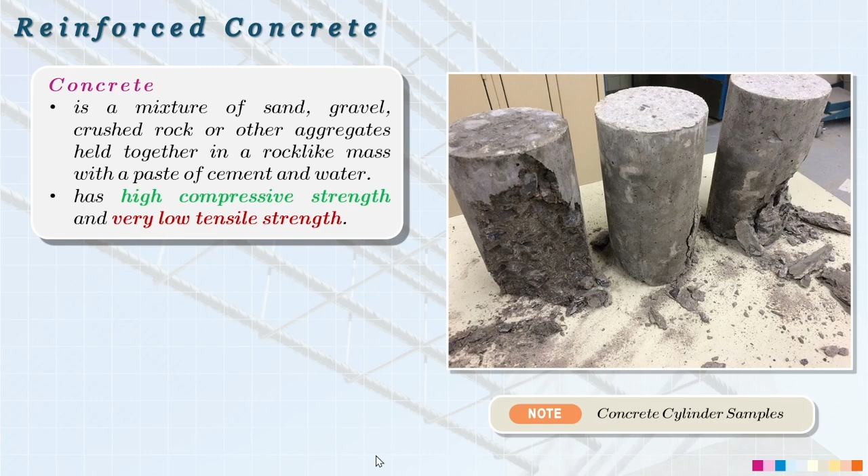Okay, so reinforced concrete is a combination of concrete and steel reinforcement. So of course, alam naman natin na concrete can handle the compression, which is yun yung kanyang strength, while yung ating steel handles the tension. Alam naman natin na ang steel is very good for tensile stress but weak naman siya in compression. Kaya sila magka-partner, hindi sila random na pinagsama. May specific role bawat isa.

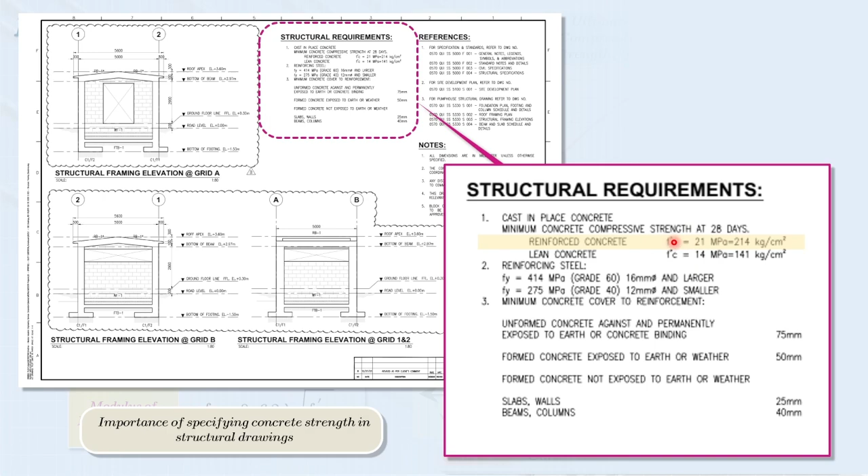So as you can see, according dito sa ating drawing, ang nakaspecify dito for the reinforced concrete, you need to use 21 megapascal. Ibig sabihin lang nito, ito dapat yung gagamitin mo in the actual execution of this project or of this structure. Okay? So actually, pwede ka naman tumaas ng 21 megapascal kung madaming budget yung procurement, no? Kaya lang, dapat hindi ka na bababa doon sa mismong structural requirements niya at the very minimum.

Okay, so next part naman tayo. So after ng ating concrete compressive strength, let's talk about the tensile strength of the concrete. So we already know na mahina ang concrete sa tension. May tensile strength pa rin siya, pero usually this is represented by using modulus of rupture. Pero sa ating concrete design, once again, madalas nagiging conservative tayo. Sa flexural design, we usually neglect the tensile strength ng concrete.

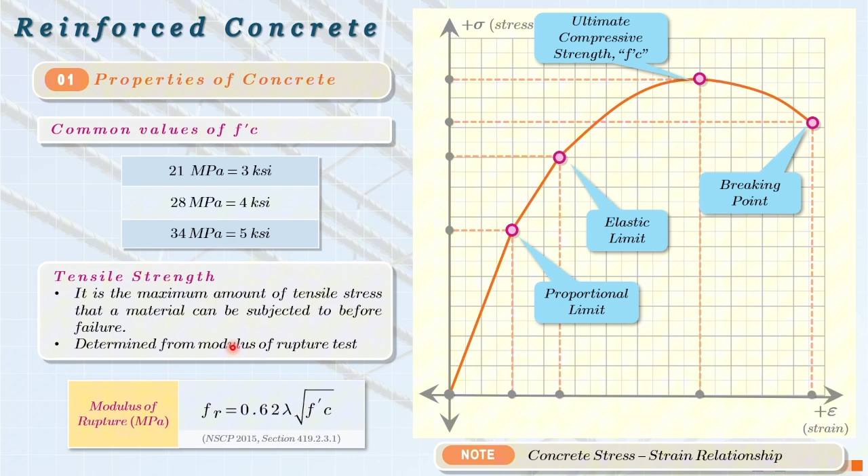Okay? So, lagi ninyong tatandaan, especially in the reinforced concrete, in the flexural design later on, concrete in tension is usually ignored and the steel reinforcement carries the tension. Okay, so let's proceed naman sa properties of the steel. So we already know that the steel is very good in tension, kaya yan yung pinaka ginagamit natin sa ating reinforcement.

Kaso, ang pinaka-importanteng property ng ating steel, especially in our reinforced design, ay yung tinatawag na yield strength. Okay? So yield strength is the stress level where the steel begins to yield. Ibig sabihin, doon siya nagkakaroon ng large deformation without much increase in stress. Okay? So, yung ating yield strength, ang common na variable na ginagamit natin dito is fy. Kung kanina sa concrete, ang ginagamit nating stress ay f'c, dito naman ay fy.

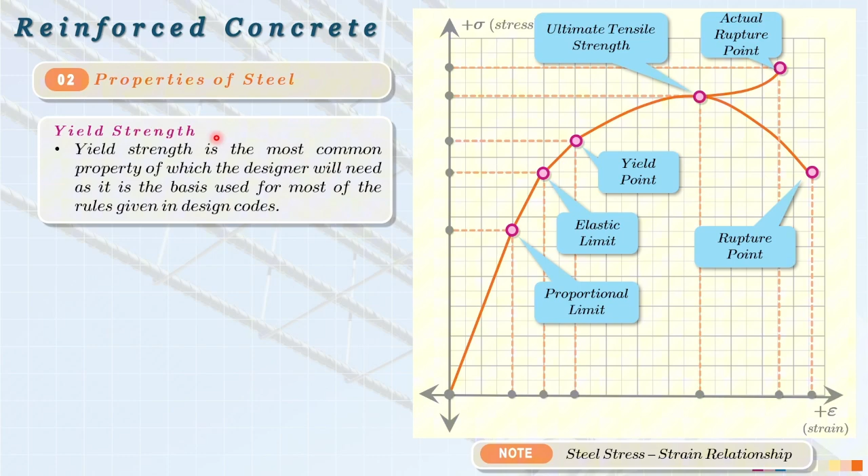Later on, makikita nyo siya all around as we go on sa mga sample problem. Okay, so the common steel grades, kaparehas lang siya ng concrete na mabibili nyo sa market or sa mga suking hardware. So meron tayo ditong grades of 230 megapascal, 280 megapascal, and 420 megapascal. Okay? Pero in the common practice of the design, lalo na sa mga main reinforcement, gumagamit tayo ng 420 megapascal.

So sa mga sample problems natin later on, may mga ranges tayo ng value ng yield strength. Minsan ginagamit is 415 megapascal, madalas naman is 420 megapascal. And that is very applicable sa mga main reinforcements natin. However, sa mga stirrups, yung mga nakapulupot doon sa ating mga bakal, gumagamit tayo ng mas mahinang yield strength. Usually naglalaro sa 230 to 280 megapascal, at ang reason dito para madali siyang mabend.

Kasi kapag gumamit ka ng 420 megapascal as your stirrups or as your lateral ties, mahirap po siyang i-bend kasi nga mas mataas yung kanyang yield strength in comparison with these two available yield strengths na pwede natin mabili sa local markets.